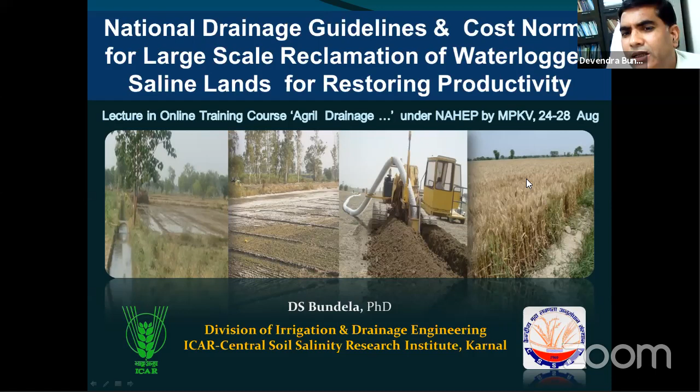Then ICAR has taken a good initiative in this regard, particularly Dr. S.K. Chaudhary, DDG NRM. He nominated or assigned this task to CSSRI, that CSSRI should come up with national drainage guidelines for the entire country for different agroecological regions. So on that basis, these guidelines were developed in 2017 and they are also under revision at this time because there are some issues which have been communicated by the states. So we are incorporating that part.

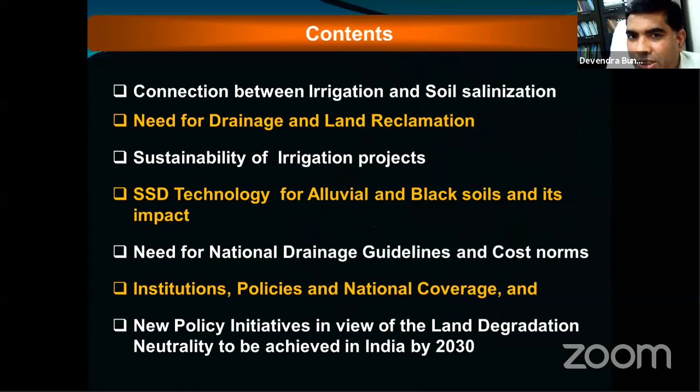In this particular presentation, we would like to cover the connection between irrigation and soil salinization. There is a good connection I would show you with examples. Then we need drainage and land reclamation because drainage alone cannot complete the entire job of desalinization.

So that I would give you the emphasis on other parts as well. The third part, basically the sustainability of irrigation projects, is a good issue, and most of the irrigation projects in India are under question because they are underperforming. Then the SSD technology for both major groups of soils, alluvial soils as well as black soils, and their impacts. The need for the national drainage guideline and the cost norm for the entire country.

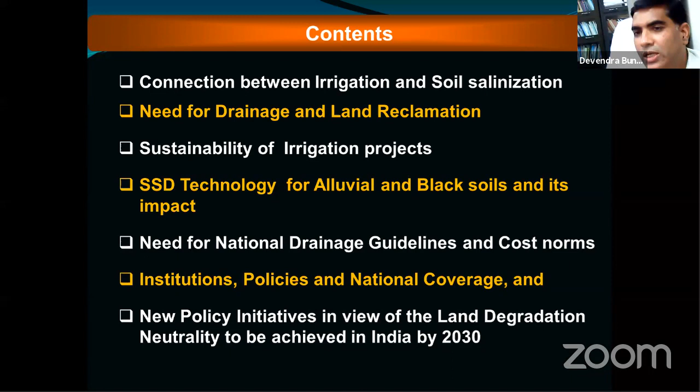Then we would like to have some overview on institutions, policy and national coverage of drainage in India, and then the new policy initiative in view of the land degradation neutrality to be achieved in India by 2030, because that's the most emphasis and we have to achieve. And here I am basically emphasizing only on the saline soils component in terms of land degradation neutrality.

And we say both scenarios are man-made scenarios, man-made wet deserts, because these are made by human failure or anthropogenic factors. Like we have the desert in Rajasthan, but they were made by nature. So these wet deserts, we need to prevent, we need to manage, we need to reclaim them so that the farmers affected by salinization can have livelihood security in the long run.

So what was the problem behind this scenario? When we look at the irrigation development paradigm, it looks quite rosy, but it was not unblemished, because the basic misconception was more irrigation, more yield. More irrigation resulted in more yield, but it was a failure on the water management front. Because of that, more salinization is happening. And if you look at this part, it was not realized at that time.

Mega quantities of water in irrigation schemes also introduced mega quantities of salts into irrigated farms. That would change the entire hydrology and salt and water balance. For example, I have studied the Western Yamuna Canal command in Haryana. The per annum salt inflow to the system is around 16.26 lakh tons per annum, which is quite huge. And these salts need to be flushed out to the drainage, or some level put down below the root zone, so that the sustainability of irrigated agriculture or irrigation projects can be maintained.

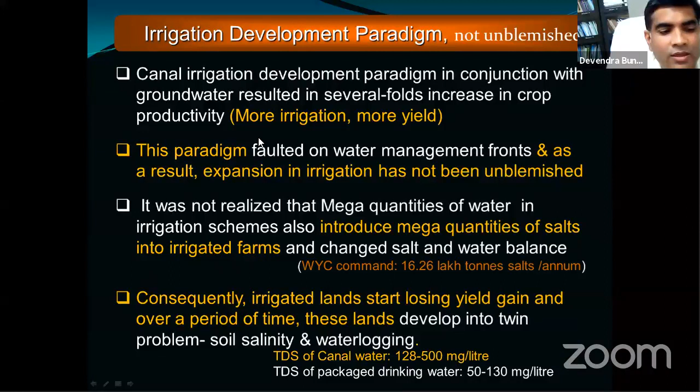So the factors which are responsible for soil salinization: the average quantum of salt applied to irrigated farms varies from 1 ton to 25.2 tons per hectare based on the canal, groundwater, or conjunctive use source. So if there is a single source like canal, or single source groundwater, then the different combinations and the quantum of salts come within this particular range.

The second issue was the rise of the water table, and that, particularly in the saline and saline sodic groundwater zone, was alarming due to canal seepage and leakage and poor on-farm water management. These issues were compounded by inadequate drainage provision in the project, and increased congestion due to rapid growth of infrastructure projects, because projects like railway, road, and other development projects hardly bother about natural drainage. So they impeded the capacity of the natural drainage, and that's why this problem got aggravated further and further.

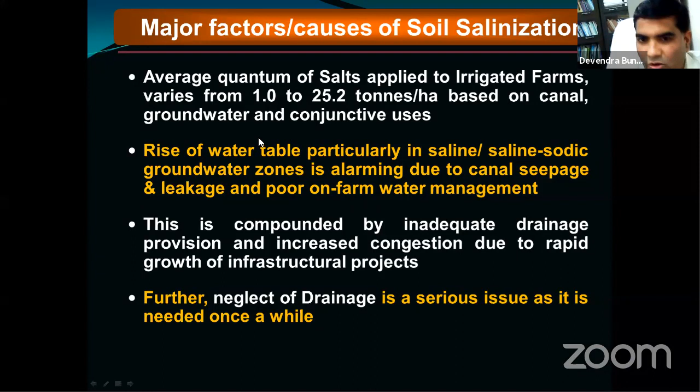Lastly, drainage was a neglected issue. Nobody bothers because it is needed once in a while, maybe in a year or two. But under the climate change scenario, it is now a large issue and it's quite visible during the monsoon every year. So that's why people, even the government, are now starting to think about this issue.

These are some of the salts worked out for the irrigated farms. If we go with canal water alone, with three cropping systems here, from cotton-wheat to sugarcane, it's 1 ton to 3 tons. This is wherever there is full canal supply, meaning the entire crop demand is met by the canal only. Then the second case is groundwater only. Here the quantum of salt applied is 5 tons to 15 tons.

But normally the canal is not supplying the entire crop demand, so in most situations it's conjunctive use. Normally we see groundwater used up to 5 EC. But 5 EC water should not be used because it comes in the poor category. 3 EC water comes in the marginal category, and up to 2 EC it's good quality water. This criteria is for irrigation. So when this 5 EC water is used for cotton-wheat, it would add salt. But this scenario hardly exists; only in a few patches, in extreme scenarios, is this visible.

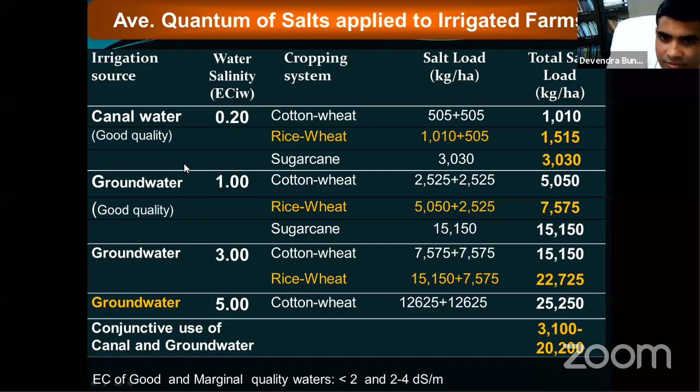Then come the system losses. In the entire canal system, the water losses are around 54 to 64% due to seepage, leakage, and poor on-farm water management. And part of this water goes to the groundwater, so that water is recoverable in the good quality groundwater zones. That happens in the Northwest and in other parts of the country.

Tube well drainage has been implemented in the form of irrigation tube wells, in canal and other areas with waterlogged sodic soils. With tube well drainage, initially with public tube wells and later private tube wells, the entire waterlogged area was reclaimed in around 7 to 8 years. So wherever good quality water has come up shallow, reclamation is very simple: just install irrigation tube wells, extract the water and use it for irrigation.

So it serves both purposes. First, basically, it will lower the water table. Second, the same water will be used for irrigation. So both ways, it's beneficial for the lowering and beneficial for the crop. That way, a large area was reclaimed, and that's why this technology is a farmer-level technology. Wherever this is the problem, farmers go alone with their own investment. They don't need any government support.

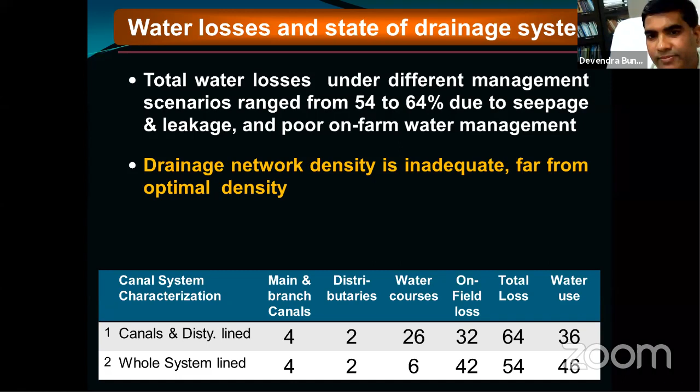This is one of the scenarios with the canal irrigation projects. So what was the plan in the irrigation project and what is happening? I am giving this for why salinization is more prevalent. Particularly when we look at system optimization, in the example of the Western Yamuna Canal command, the system was designed based on water productivity. That means we have to produce more with the same unit of water.

But the current scenario is land productivity, because here the farmers have very small land, less than 1 hectare or around 1 hectare. So they say the limiting factor for us is land, not water. So we have to maximize production from the limited land. So water productivity, that plan component, was changed to land productivity.

And when we look at the irrigation intensity, it was 52% planned and currently it is 186%. The major contribution comes from groundwater, around 116%. This groundwater is of multiple quality: good quality, marginal quality, and to some extent poor quality. The farmer is forced to apply it because the emphasis is land productivity.

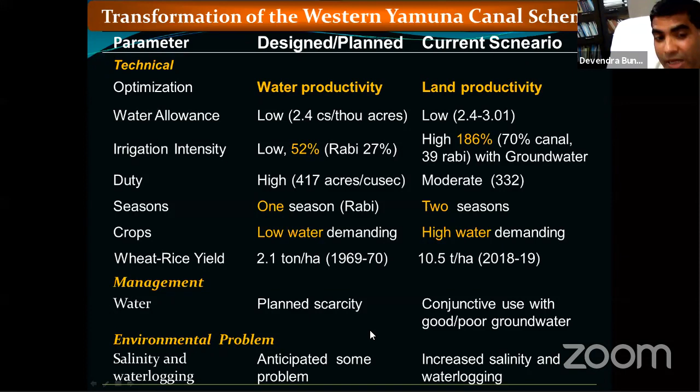Then there was the environmental issue. Initially it was anticipated there would be some salinity problem, so curative measures would be taken up. But ultimately this resulted in increased salinity and waterlogging in a major way. That's why the canal command projects are underperforming, and there is also an issue of environmental sustainability.

Now coming to saline soil, particularly in the canal command. There are two kinds of saline soils in the canal commands. The first category is waterlogged, the second is non-waterlogged. These two categories have different prescriptions we have to follow. For waterlogged soils, the majority are saline, but there are some cases of waterlogged saline sodic soils. For that category, we need a third level of prescription, which is gypsum.

But normally, we first need drainage, and then we have to follow with salt leaching. Drainage alone is not complete desalinization. Salt leaching is more important, and it is basically done in two ways. Wherever there is a gravity outlet, it is done automatically; we only have to apply enough water for salt leaching. But in the case of a pumped outlet, we need to operate the drainage system for an optimal number of hours. Then we can achieve optimal salt leaching.

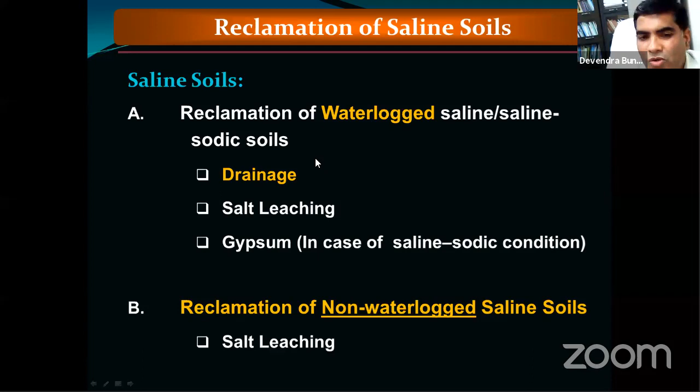And wherever there is a problem of saline sodic soil, particularly the sodic component, after drainage we have to apply gypsum and then go for salt leaching. But in the case of non-waterlogged saline soil, only the salt leaching component is required.

So these are some of the reasons why drainage is needed. All the reasons here are listed by Ritzema of the Netherlands, who worked with CSSRI under the Indo-Dutch projects. The first three are quite important, and the others are aspects of health and environment. The first reason is that drainage protects the irrigation investment, which is quite true. If we cannot implement drainage, then the sustainability of the irrigation project is a big issue. So drainage is important to protect the investment.

The second aspect: drainage sustains and increases yield and rural income, which is quite true. The third: drainage protects the resource base for food production; the arable area should not decline due to waterlogging and salinity, so that resource base needs to be protected. Others: drainage infrastructure serves rural and urban residents as well as industry. Drainage protects human lives and assets against flooding and high groundwater levels. Drainage services improve health conditions, and drainage regulates water quality.

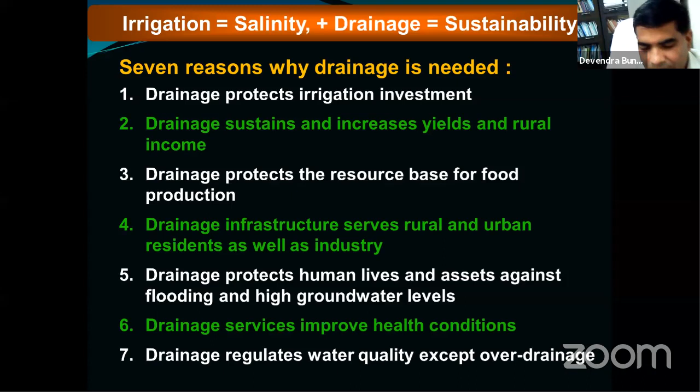Then the CSSRI research component comes. CSSRI basically started research in 1969, but research on drainage in particular started in 1972. Sampla was the first site, and in the entire Haryana, 10 small pilot schemes ranging from 10 to 40 hectares on SSD were installed, monitored and evaluated. And then CSSRI came up with the SSD guidelines for manual and semi-manual installations in 1984.

Then for large scale implementation with mechanized installation under the Indo-Dutch network project, around 2,400 hectares at 5 sites, or 5 agroclimatic regions like Haryana, Rajasthan, Gujarat, Andhra Pradesh and Karnataka. They conducted the study at quite a large scale, and based on that they came out with guidelines for mechanized installation for reclamation of waterlogged soil.

And that SSD technology was adopted in 10 states: Punjab, Haryana, Rajasthan, Gujarat, MP, Maharashtra, Karnataka, Telangana, Andhra Pradesh and Kerala. And this technology has contributed enormous socio-economic benefit and livelihood security to millions of resource poor farmers living in the salinized lands.

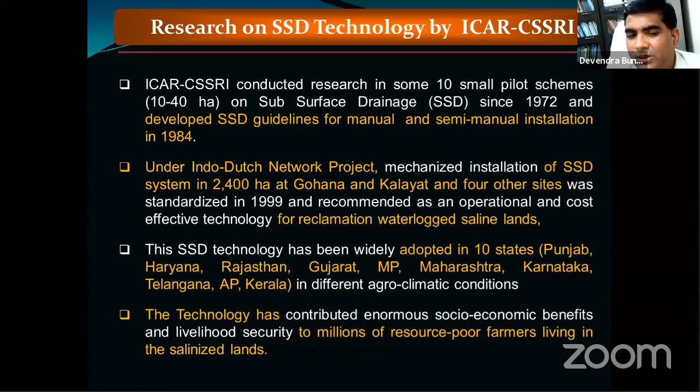Then what's the current scenario for saline soil, and how much waterlogged saline soil needs to be reclaimed in the next 10 year plan? Basically 2.95 million hectares of land is affected by the twin problems of waterlogging and soil salinity, and the current economic loss due to this is around 8 to 10,000 crores for the country. Immediately, 1.37 million hectares of waterlogged saline soils in the country need to be reclaimed in the next 10 years, because that is the target based on the existing assessment of 1996, where 2.95 was the saline soils.

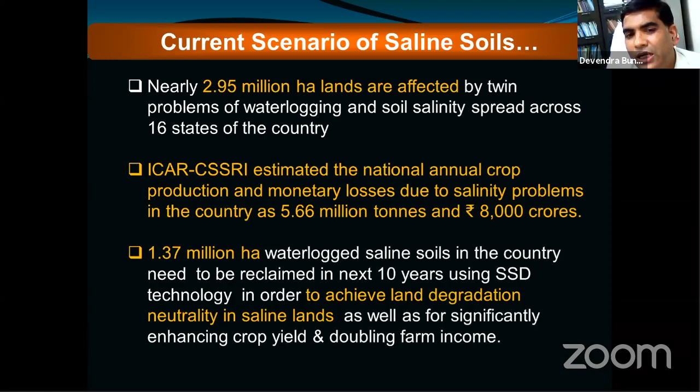But as this increases, more area will come up. But if we can achieve the 1.37 million hectares in the next 10 years, then I think that would be a good beginning. And later on we have to make a better and larger target to achieve land degradation neutrality.

This is the technology, basically the SSD. You can see the barren soils here, completely barren with waterlogging and salinity. This is for the alluvial soils, and this is for the black cotton soil. And these are the heavy machinery used, because in SSD installation basically 3 to 4 operations need to be done in one go, because these are waterlogged saline soils.

So when the trench is cut by the machines, if the pipe is not laid and grade is not provided to the pipe, then the sides of the trench collapse at the same time. That's why heavy machines are needed, and all 4 operations need to be done simultaneously: digging, laying pipe, providing grade, and backfill. These components need to be done at the same time.

But there is an advantage with black cotton soils particularly, because black cotton soils are quite stable even with waterlogging. The sides don't collapse. So in that one particularly they are using this machine. Later on there was an improvement: they can go with a hydraulic excavator of around 100 to 120 HP. That is working quite well. So far in the country, 71,334 hectares in 10 states have been reclaimed.

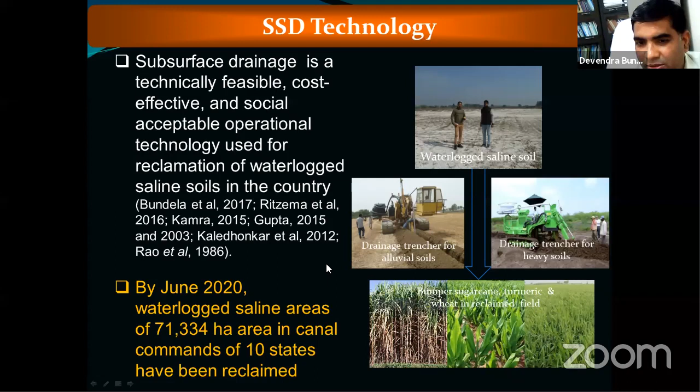So this is the process flow chart for designing SSD systems, how we can design and quickly do modifications with the drainage system. A drainage system always starts with the outlet. Here is the flow chart. Basically the information required is climate, topography, soils, crop, water table, and salinity. Then we assess whether drainage, particularly subsurface drainage, is needed or not.

If, based on the site survey, the feasibility report says drainage is needed, then we straightaway confirm the outlet type, whether we would have a gravity outlet or a pumped outlet. It is based on the topography, but in most cases we would have a pumped outlet. But in some cases, like a lift irrigation command, we could have a gravity outlet.

Once the outlet type is decided, we can straightaway go for the drainage coefficient, drain depth, and spacing. Once these parameters are decided, we go on to choose the system layout, maybe singular, maybe composite, and then parallel or grid pattern or herringbone, based on the topography of that area. Once this is decided, we determine the pipe size and the grade.

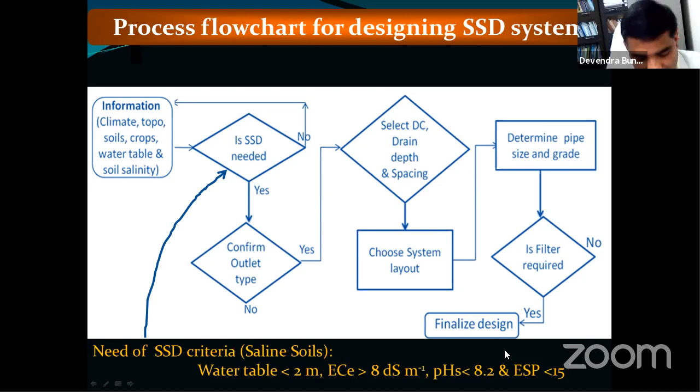So these are the drainage parameters, and here the drainage coefficient is based on the climatic regions, arid, semi-arid, subhumid, and this is the range. For arid 1 to 2 millimeters per day, semi-arid 1 to 3, and subhumid 2 to 5. But for most of the country, particularly the arid and semi-arid, we are following 1.5 millimeters per day.

And then the drain depth is based on the outlet. In the flow diagram, once we decide whether it's a gravity outlet or pumped outlet. In case of gravity outlet, we normally go from 0.9 meter to 1.2 meter, based on the length. But it should be less than 1.5 meter, and for the pump 1.2 to 1.8 meter.

And spacing for the different textures: light textures around 100 to 150 meters. But normally we follow 100, 110. We are not going more than that. For medium textured, the range given is 50 to 100 meters, but we are following 60, 67 or 75, but not more than that. For heavy textured soil, 20, 30, not more.

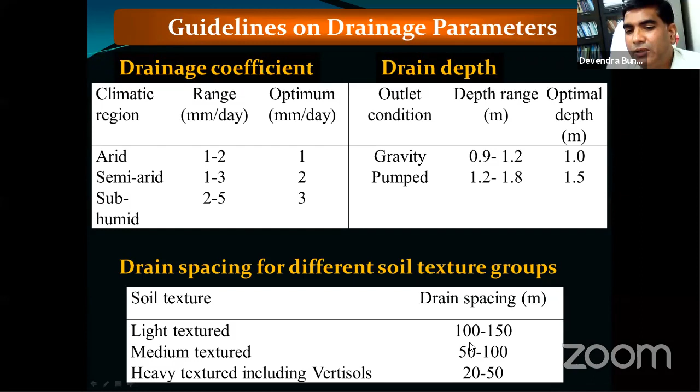But recently farmers are more willing to have narrow spacing. So they are going for 15. Sometimes 15 is good for rapid reclamation, but later on that will cause the problem of over drainage. So that's why wherever it's 20 meter or 15 meter, we are recommending it only with controlled drainage.

Next is the design equation, which uses the transient state Glover-Dumm equation. But for simplicity, we use the Hooghoudt equation. Layout, as I already said, singular, composite, pattern, parallel grid or herringbone. For the lateral pipe, 80 mm pipe, we are recommending with a grade of 0.1%. For the collector size, 90 mm to 294 mm collectors.

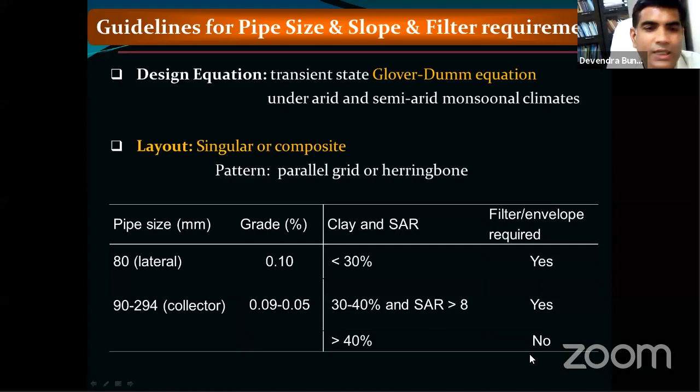And for the filters, wherever there is more than 40% clay content, the filter is not recommended. But as I already told, for safety of the drainage system, because the system is installed for the long term, which is 25 years, and because the cost of the filter is quite low, we are recommending it for the longevity of the system.

This is the comprehensive design criteria followed for the different soils. This criteria is for Northwest India, and this is for Western and Southern India. Drainage coefficient 1.5 mm per day for both situations, and drainage spacing 60 or 67. For heavy texture soils, 30, 20, 15, but 30 is now discontinued, because the government agency was recommending that one, but reclamation is quite slow.

To improve the reclamation, the 20-meter spacing is quite good, the reclamation time is shorter, and yield enhancement is appreciable. The only thing is that we have to recommend 20-meter or lower spacing with controlled drainage only. That's why in Maharashtra, particularly Kolhapur district, the 15 and 20-meter projects are being implemented with controlled drainage only.

The lateral depth, as already said, is around 1.5 to 2 meters for northwest India, and 1 meter to 1.5 meters for western and southern India. Collector depth 2.5 to 3 meters, and here 1.6 to 2 meters. That means the entire operation is finished within 2 meters in the black cotton soils.

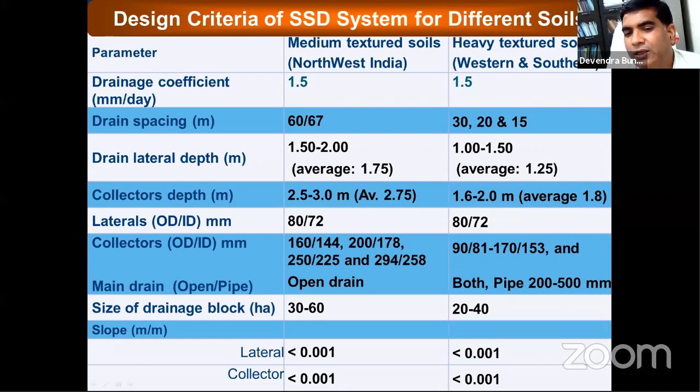Nowadays land is quite costly, and farmers are not willing to share land for open drains. So instead, they are suggesting pipe main drains. This increases system cost, but it's a quite good solution. The size of the drainage block is 30 to 60 hectares, and for black cotton soil, 20 to 40 hectares, with specific slopes provided for both lateral and collector drains.

There are couple of drainage solutions like subsurface drainage. Basically, we don't say one is better than the other; they are complementary to each other, and we should adopt an integrated drainage approach. It's not that subsurface drainage is better than surface drainage. They each have a domain, but they're complementary. So the first requirement of an irrigation project is the open drain.

It reclaims quite a large area, but there are still large pockets where the water table is shallow in saline groundwater zone conditions, where we need subsurface drainage. In subsurface drainage, particularly the horizontal one, farmers are not willing to do deep open drainage because it needs a lot of maintenance. That's why they prefer pipe drainage, which is quite popular in SSD.

Mole and chimney drainage have their own domain. Vertical drainage sometimes does a good job, but in saline groundwater zones, it creates environmental problems because we have to draw more than 10 times the volume of water compared to pipe drainage.

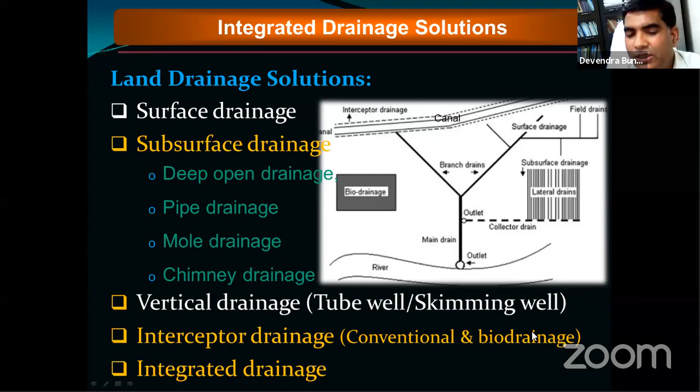But there is a need for integrated drainage. For that, we need a drainage master plan for the area, because we need the complete aspect of total drainage. Wherever prevention is needed, we go for preventive drainage. Wherever part prevention and part curative is needed, we go for that. And wherever totally reclamative or curative drainage is needed, we go for that.

So this is the saline soil reclamation package. Here, the drainage component alone is not the only important thing; there are other supplementary components that play a good role. First, wherever there is abandoned land that needs rehabilitation or reclamation, we need land clearing, land grading, and field leveling.

Then comes the surface drain cleaning component, which is quite important. And then the installation of subsurface drainage to control water table and salinity, followed by salt leaching.

Then comes the selection of salt tolerant crops and cropping systems, because in the first year the entire salt would not be leached out. So we should go for salt tolerant crops that can give quite better yields, and then follow improved agronomic as well as water management practices.

Above all, capacity building of farmers or farmer drainage societies is more important, because they must know what to follow and when. For maintenance of the systems, they must be trained and their capacity must be built.

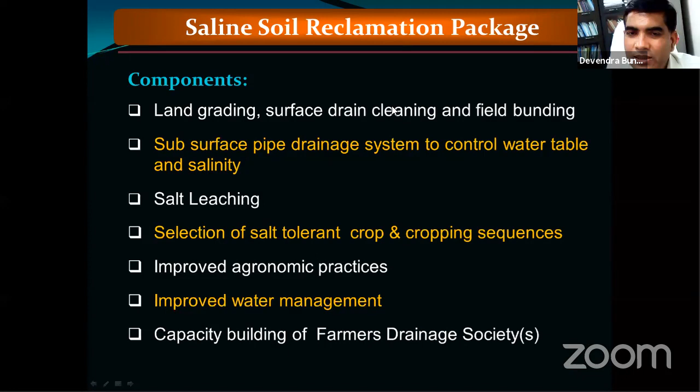This is basically the implementation part of it, in northwest India. When the entire machinery is in the field, the first thing is to start with installation, setting up the laser system, because the grade is provided by the laser to the pipe. The left-hand photo shows the setting up of the laser system.

The second, middle photo shows the installation of the collector drain by a 400 HP drainage trencher. This trencher is from the Netherlands, made by Hollandrain, model BS4000. And then the installation of the lateral drain pipes follows.

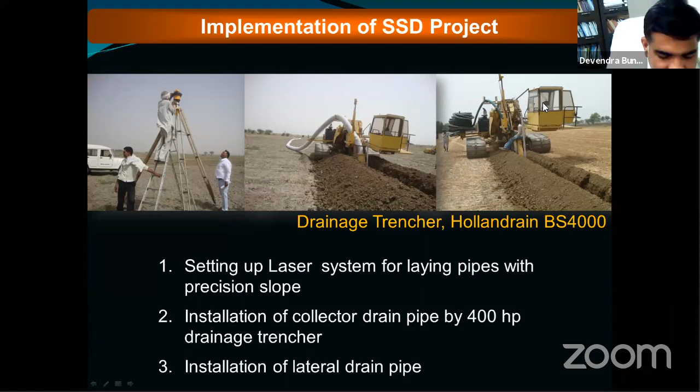There are a couple of implementation modes for subsurface drainage. In some states, the state department is implementing it. In some states, there are specialized agencies, and in some states, the drainage contractor or industries are implementing. Recently, NABARD is also coming into the picture, and they want to promote reclamation of saline soils.

The entire drainage project needs to be implemented through the NGO, through what they call the PFA, the Project Facilitating Agency. So CSSRI is also working with NABARD in Rohtak and Jhajjar districts through the NGO. But there are still limitations, because that NGO is not quite large, their capacity is quite small. So we still need to involve the drainage contractor. That's basically the pilot model which we are trying.

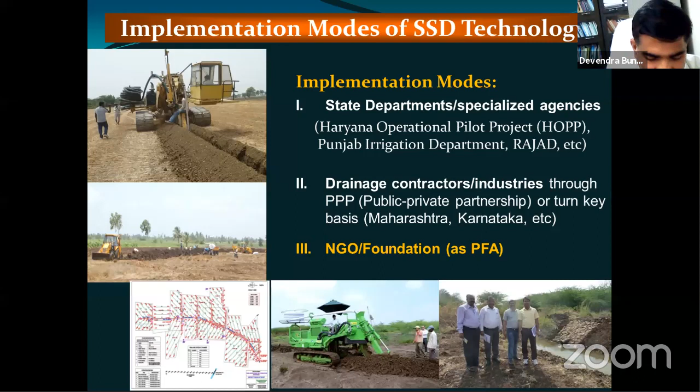As I said before, SSD is a highly technical and skilled job. It's not very simple, it needs a lot of training for the implementing agency, the funding agency, and the farmers as well. Otherwise they would not know, because the machine is doing the entire operation. So sometimes it's quite difficult to tell them why we need a larger machine for the implementation.

If you look at the fleet of these machines, it's quite a large fleet, particularly in Haryana. The project size is normally 500 to 1000 hectares, which costs around 5 to 9 crores. The machines required for implementation include the drainage trencher, which is a 400 HP machine, then the hydraulic chain type excavator to install the manholes and other things.

Then we need the bulldozer to clear the path of the trench line, because the trencher needs a smooth surface so that it can provide a precision grade to the pipe. If there is a bund, there will be a jump, so we normally demolish all the bunds during installation. The bulldozer is followed by the trencher, and then the bulldozer does the backfilling job as well.

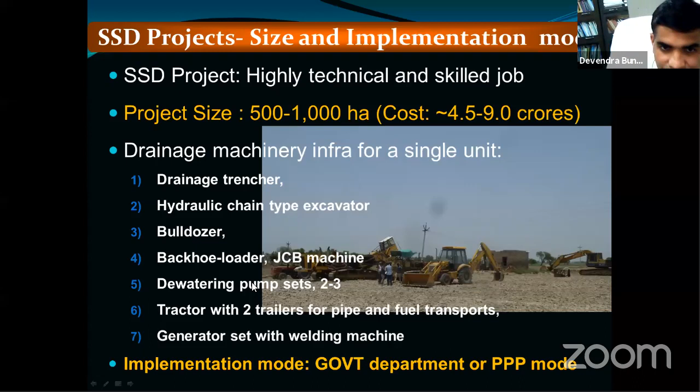These are the SSD projects in the Vertisols, particularly in Maharashtra, Karnataka, and Gujarat. Here the farmers are growing sugarcane, which is quite a remunerative cash crop. So the farmers are paying themselves for the cost of SSD reclamation, realizing the benefit and impact of the technology on crop yield and farm income. This technology in Maharashtra and these states is implemented in the PPP mode or turnkey basis for improving the reclamation pace.

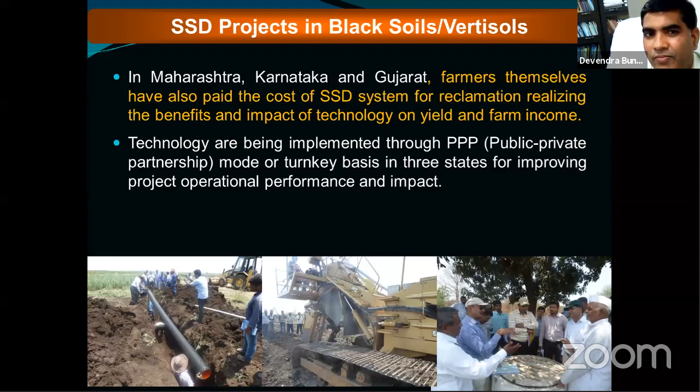That's why in Gujarat as well, farmers are willing to pay the cost for the entire system. But for larger scale, some farmers have the capacity and are coming forward, while there are marginal farmers as well who don't have that much capacity. So what they are suggesting is that they can pay around 50% of the system cost, and the government should provide the other 50%.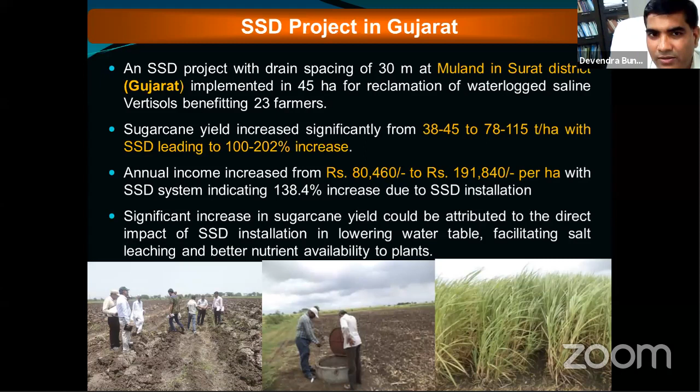As I told before, in black cotton soils the earlier recommended spacing was 30 meters. With that, reclamation was not very rapid, but in 3 years the results were quite good. However, farmer response was not quite good because they wanted early gains. So CSSRI reworked the design parameters and recommended 20 meters spacing, but farmers are still willing to go for 15 meters. So there are both cases, 20 meter and 15 meter, but this spacing was recommended with controlled drainage as per the national drainage guidelines, so that there will be at least minimum environmental pollution at the downstream.

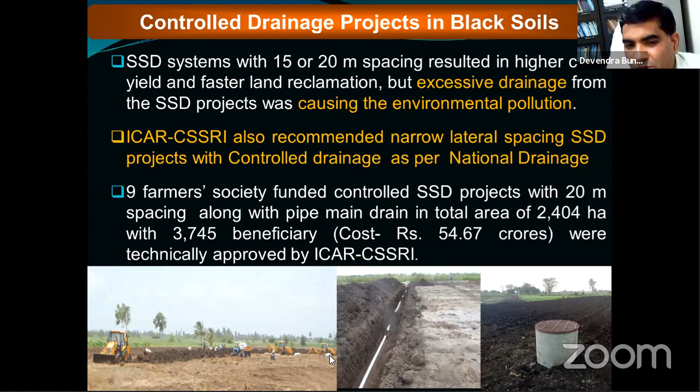Earlier we were using heavy machinery like a trencher, but recently a JCB hydraulic excavator has been deployed for the installation of subsurface drainage. So this is the fleet of machinery installing the subsurface drainage. This is the pipe laying, this is the manhole. These are the project 9 control drainage projects, and Sri Sal is coming from the Sri Gurudutt Sugar Factory. He will highlight all these issues.

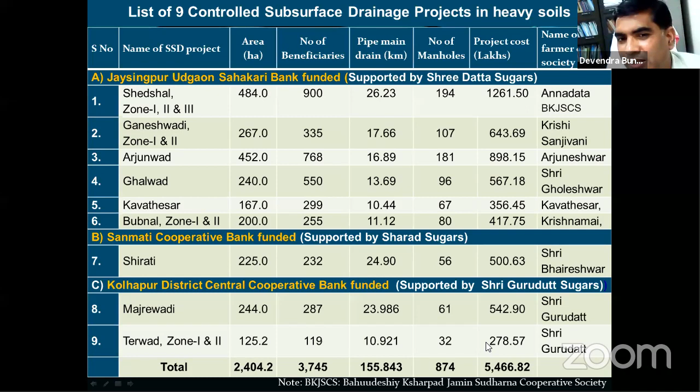So there was quite a good improvement in this part. Earlier, what was the scenario? We had uncontrolled drainage, or conventional drainage. In conventional drainage, particularly in black cotton soils, there is a gravity outlet, so the outlet is running throughout the year wherever the water table is higher than the lateral pipe. This was causing environmental pollution issues. But at 30 meter spacing, the environmental pollution was not significant, though there was loss of irrigation water and loss of nutrients to some extent.

But when this system was implemented with 20 meter spacing, there was quite a lot of irrigation water loss and nutrient loss. That's why control drainage was implemented, and here you can see the control drainage in a better way. This is the control valve fixed at every collector, operated by the farmer as per their requirement. Whenever they are applying irrigation, they shut it down, and whenever they are not applying irrigation or other inputs, they open it. Based on that, they save around 30% water and around 15 to 20% fertilizer. This system is quite good in terms of environmental issues.

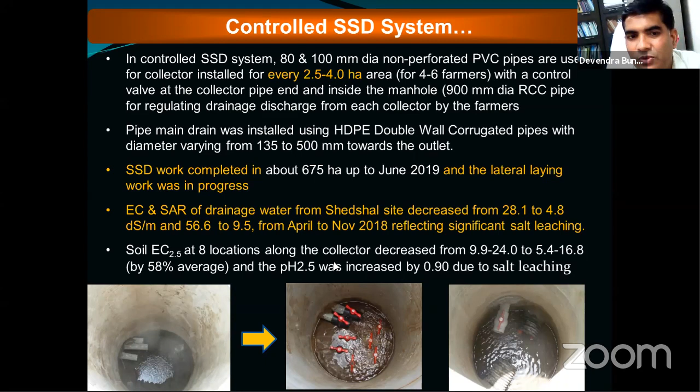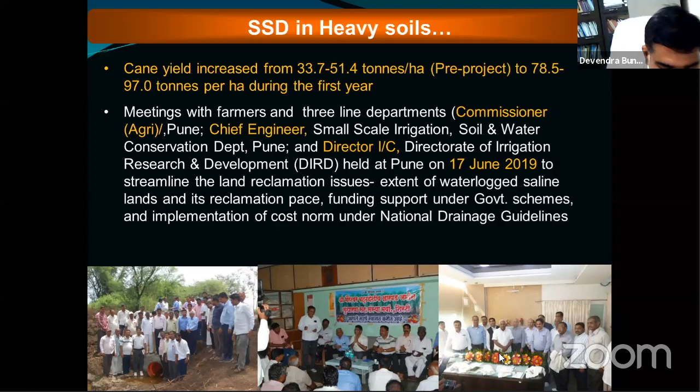This is the impact. The SSD technology has a quite good, appreciable impact: crop intensity increased by 40 to 50%, crop yield by 50 to 110% - for rice 30 to 110%, wheat 20 to 120%, and sugarcane 100 to 200%. Farm income increased by 200 to 300%. BC ratio is quite good, 1.5 to 3.2. Cost recovery in 2 to 3 years. Internal rate of return 20 to 58%. Besides that, it generates 128 man-days of employment per hectare annually - quite a lot of employment generated by these projects. In terms of soil salinity reduction, pre-project salinity was around 10 to 42 dS/m, reduced to 2 to 5 dS/m within 2 to 3 years. So it's making quite a significant impact in terms of salinity reduction, yield improvement, income improvement, as well as lowering the water table and salinity.

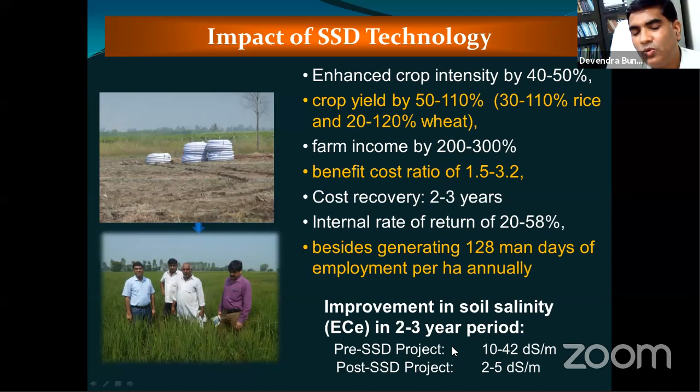Then now we are coming to the national drainage guidelines. What component of the cost norm has been included here? Because our emphasis was that whichever agency is implementing the drainage project, it should have the totality for the implementation. So any component should not be missed out wherever that may be the constraint in implementation.

So the 8 components basically were implemented, and the other components are also listed in the rider as well, because they are not applicable at every project. So in some special cases that rider is also there, like field survey and investigation, planning and design. That includes the preparation of the DPR basically, and ultimately up to the tendering process.

Because here we were emphasizing not only the state government agency; the drainage industry and drainage contractors must come, because for the larger goal we should invite every sector. Even the private sector efficiency we can harness through these guidelines to achieve a better reclamation pace. So that's why, based on the CPWD norms, we have provided 2,500 rupees per hectare. That amount is provided here.

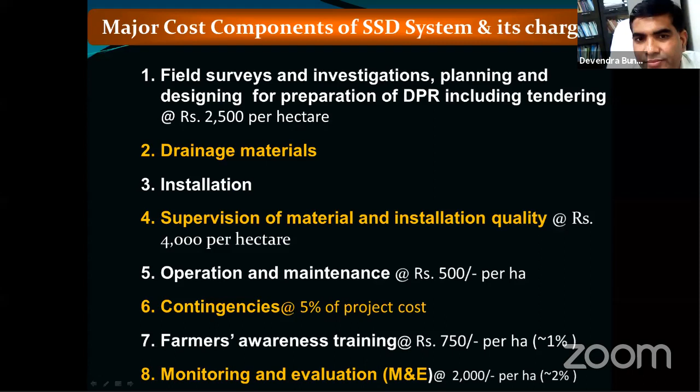So these are the drainage materials used, like the lateral pipe. They are PVC flexible corrugated perforated single wall pipes. Mostly the 80 mm diameter pipe is used for the lateral, conforming to these IS standards. Then for the collector and main drain, corrugated PVC, and HDPE for the main drain. This is the diameter. Synthetic filters and envelope: two types of filters are used, one for the lateral, another for the collector.

So here non-woven polypropylene fabric is used for this one, and for the collector, woven. The woven nylon socks are basically used for northwest India, but not used in the black cotton soils. Structures and pump sets like manhole, junction box, sump well, outlet structure, pump houses, and the diesel pump set. So these are the materials. This is the lateral pipe. This is the collector pipe. This is the HDPE pipe for the main drain.

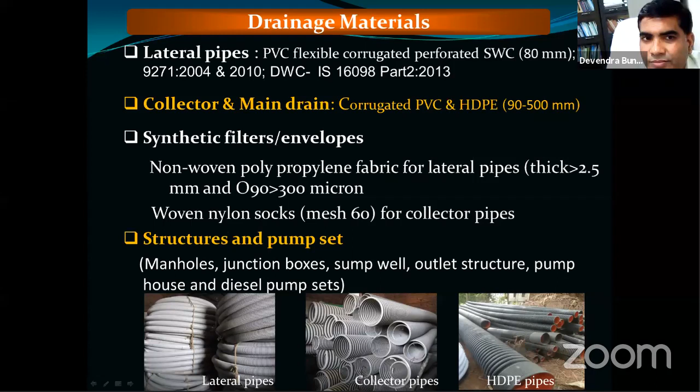And then we worked out the quantity required for installation in a drainage block, as the spacing changes from 20 meters to 100 meters, because this is the more optimal range for the entire country. So for 20 meter spacing, basically 20 kilometers of lateral pipe is needed for a 50 hectare block, and for 30 meter, 13,600. Similarly for Haryana, we use 6 kilometers of lateral pipe length for a 50 hectare block.

And then the collector pipe for every drainage block. So for the black cotton soil 400, and then for 200 mm, 330 meter and 250. So this is the collector length of 1 kilometer and 20 kilometers for the lateral, and then the wrapping of the pipe for all this. That way the entire quantum of material and how many manholes per block has been worked out. Like a sump well: items 6, 7, 8 and 11 are not needed for the gravity outlet for black cotton soil. So that component is not considered in computing the cost, but here it is listed.

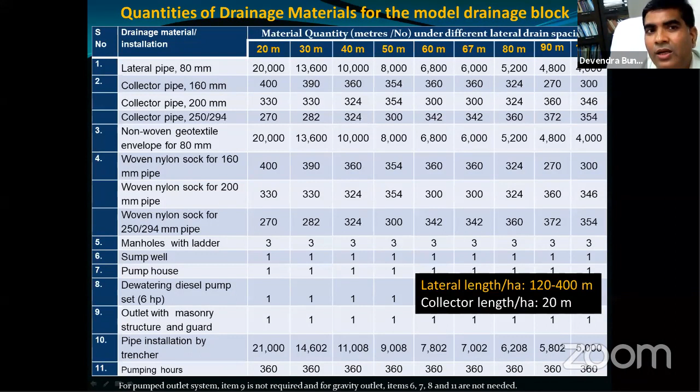So these are the materials and their unit cost during 2017. PVC corrugated and perforated pipe, these are the pipes for lateral, and this is for the collector. We consider the unit cost given here. So it varies from 58 rupees per meter to 870 per meter.

Nylon socks, the cost is around 45 per meter. And then for non-woven, it comes to 47 rupees. And RCC pipe, the sump well, it is costing around 33,000, manhole 14,000, and diesel pump 47,600. And these are the government approved rates, basically taken from the Haryana government.

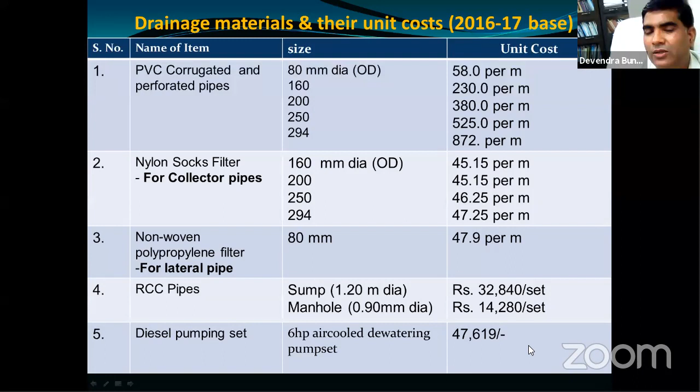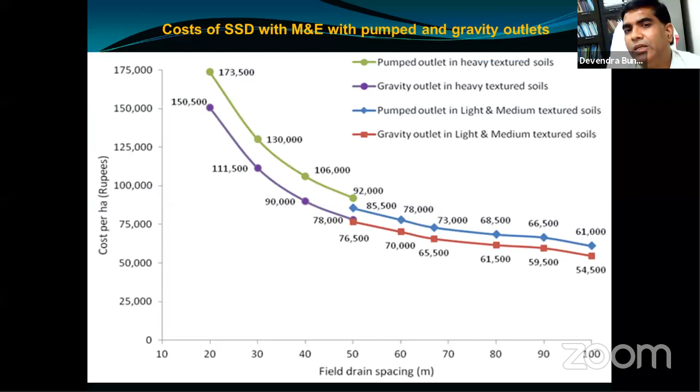So once we work out the entire cost for different combinations, like pumped outlet, gravity outlet, then alluvial soil or heavy soils, these are basically the 4 curves you could see on this particular graph. So this first one is the gravity outlet for northwest India. But in northwest India, there are hardly gravity outlets. Mostly they are pumped outlets.

So this particular blue curve is more applicable in northwest India, which costs around 85,500 to 61,000, based on the spacing. And then when we look at the black cotton soils, the gravity outlet is more prevalent. But there are some pumped outlets, like in Andhra Pradesh and Karnataka. But in case of black cotton soil, as a general scenario, normally this violet line is more

applicable. So this started with 20 meter, but normally that included 2,000 rupees for monitoring and evaluation, because not every project is monitored and evaluated. So that's why this cost comes to 1,48,500 for 20 meters.

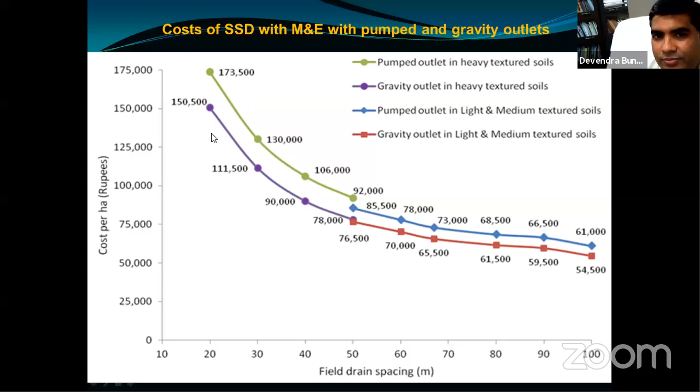This is the cost breakup for the different spacing, like for the heavy texture soil. Here I am giving the 30-meter one. This is for 67 meter. So what I would like to say is that when we look at the material cost, it comes around 54%. These are the three materials: pipes and fittings, filters and structures. So that costs 54%. Then installation cost is 33%. So if you include both, it comes to 87% of the cost.

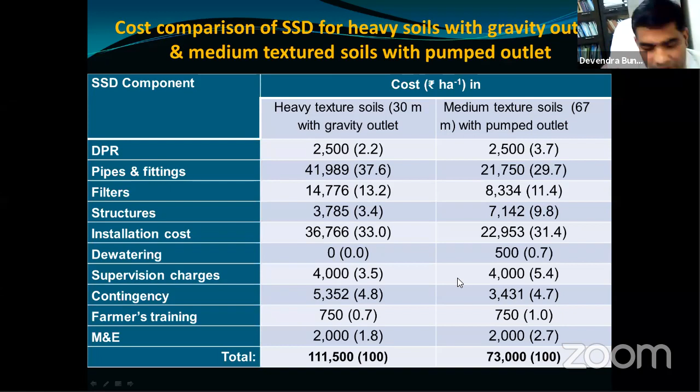Similarly here it also comes equally, 29%, 11% and 9.8%. So here the material cost would be a little less than for the black cotton soils, because here less material is used. So that way we are giving the structure, how much share each component has in the entire cost.

So this drainage guideline and cost for the SSD was published in 2017, and then this guideline was submitted to the ICAR NRM division. From there it was examined and then submitted by DG ICAR to the Secretary Agriculture. Later on, the Secretary DARE as well as Secretary Agriculture communicated this guideline to the Chief Secretary, Agriculture Production Commissioner, Principal Secretary, Agriculture, of the 12 states for inclusion in the RKVY and other programs, because they suggested this guideline is quite comprehensive.

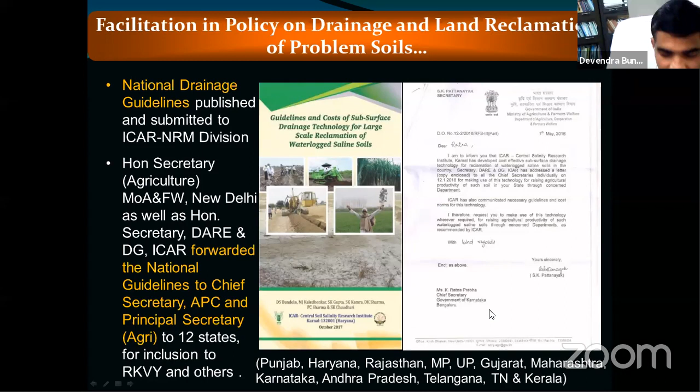So these are the states: Maharashtra, Punjab, Haryana, Rajasthan, MP, UP, Gujarat, Karnataka, Andhra Pradesh, Telangana, TN, Kerala. These 12 states, and this is the sample copy of the letter communicated to the state of Karnataka. Similarly, we have a couple of letters here. The DG ICAR has also written to the 12 concerned states, and in total they have forwarded 35 letters to the state governments to make this program a state program.

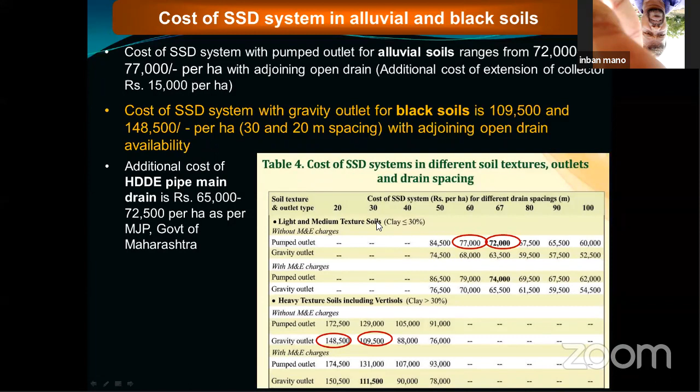And additional cost was coming around 65,000 to 72,500 per hectare because the pipe size is quite large, starting with 200 to 500 millimeters. And this is basically the scenario like a pumped outlet, medium light texture. This is the Haryana case. This is the Maharashtra black cotton soils in many states. So gravity outlet 148, as I said before.

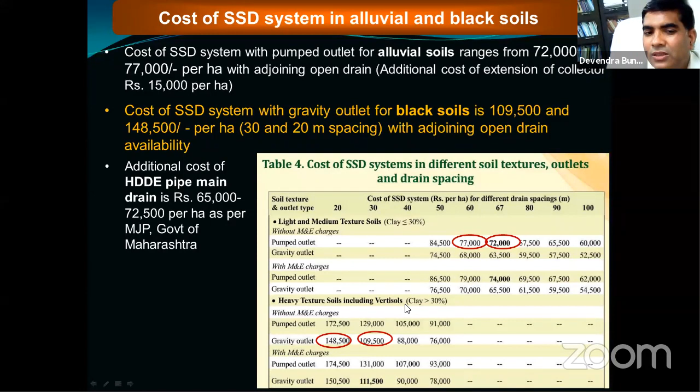These are some of the riders of what was included in this national drainage guideline and what was not included, so for that extra provisioning. Like the above SSD cost does not include tree removal, cleaning and deepening cost of the drain, approach road, land development, maintenance cost, farmer share, and the pumping cost from the second year onward. This includes the collector length of 25 meter per hectare, assuming the surface drain in vicinity.

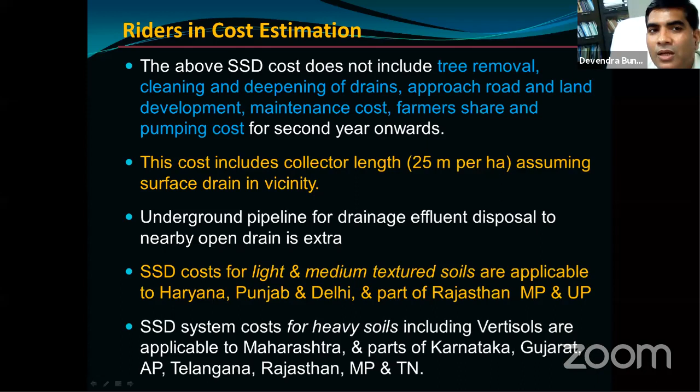If additional length is needed, that can be provided; we have provided that detail as well. These guidelines, particularly for light and medium textured soils, are applicable to Haryana, Punjab, Delhi, and part of Rajasthan, MP, and UP. For heavy soils, these are applicable to Maharashtra, part of Karnataka, Gujarat, Andhra Pradesh, Telangana, Rajasthan, MP, and Tamil Nadu. This much area so far we have covered with the existing institutions and existing policies.

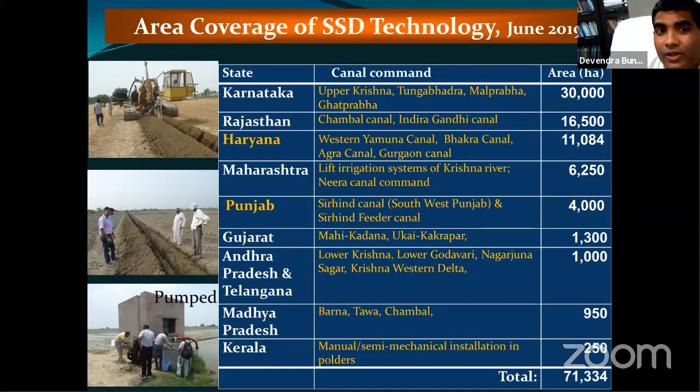So the major contributor here is Karnataka, and then Rajasthan, Haryana; Maharashtra is only 6,250, Punjab, and that way only just 5% of the affected area has been reclaimed in the last 25 years. So that progress is not quite significant, as we see the increase of soil salinization and waterlogging in the country. So the problem was basically with the policy.

So we have highlighted some of these problems, like the implementation of SSD technology or drainage technology is a highly skillful job and mechanized work. So it cannot be implemented by every department. They need to have capacity. They need to have trained manpower. The department may say, okay, we will take up the SSD project, but later on they realize they cannot implement it.

Then the second problem was the current cost norm. The cost particularly given for open drains and subsurface drains is highly inadequate. Wherever the cost is coming to a minimum of 110,000, and it is just providing 60,000, less than 50% of the cost, how would the department take up the program? So that was not possible. That's why many departments came forward and resisted. They said, no, there is no point implementing because this is infeasible.

And because of this, at the country scale, the progress is quite insignificant. I would say, particularly 5% in 25 years is nothing basically. And if you look at sodic soil reclamation, we have reclaimed around 42% of the area in the last 35 years. So that made a significant impact.

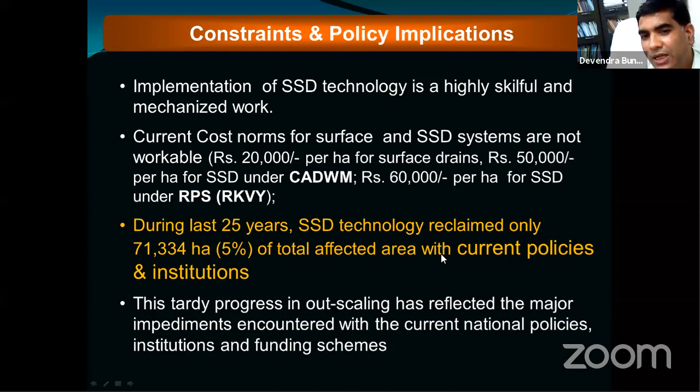And for this, there are many issues which we need to look into in view of land degradation neutrality and other policy aspects. Currently, there is no integrated and centralized organization for drainage in this country. In some states, SSD is implemented by agriculture, small scale, watershed, CADA, and surface drainage exclusively by one agency. For surface drainage there is an agency, but for subsurface there is no agency at the country scale. Because of that, there are many issues with SSD, so it needs to be integrated and institutionalized at the state or national scale.

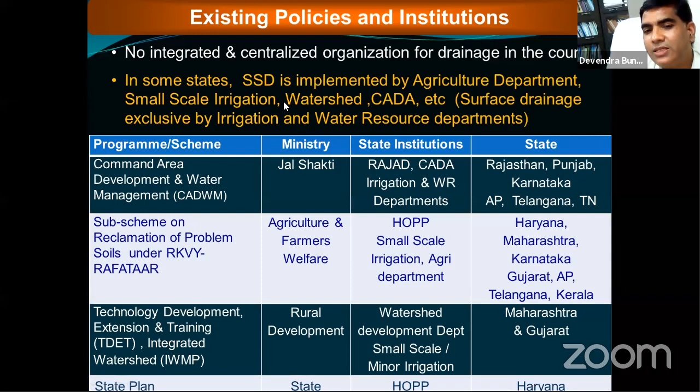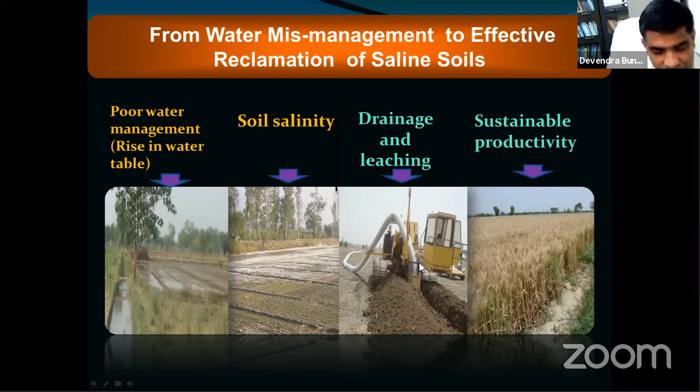So we started from the first slide, and here we will be providing the complete solution as well. If we follow poor water management, it will result in this scenario. This is the technology component, where we should implement drainage and leaching. Then in the long run, we could achieve sustainable productivity in the canal commands. So this is the solution, and this is the way we should go. So this is the pathway basically.

What would be the pathway in the coming five to 10 years? In view of the National Agricultural Drainage Guideline, existing policy, institutions, and funding need to be revisited and improved to address the slow pace of implementation of drainage technology. And then there is a need to have a drainage policy paper at the national and state level, emphasizing time-bound action to reclaim waterlogged salt-affected lands. Further, there is a need for a state, command, or basin-wise master drainage plan to be prepared under the National Water Policy 2012.

And then an exclusive policy, because under the RKVY, subsurface drainage is clubbed with sodic soils, acidic soils, and other problematic soils. So whatever fund comes under that sub-scheme is utilized by the easier programs, where they have to distribute lime, gypsum, and other components, and those departments are quite comfortable. But SSD being a completely technical job, the department is not able to deliver. So if there is an exclusive program, then easier programs cannot eat its money. It needs an exclusive policy, exclusive funding, and a dedicated institution for reclaiming waterlogged saline soils, with emphasis on project outsourcing.